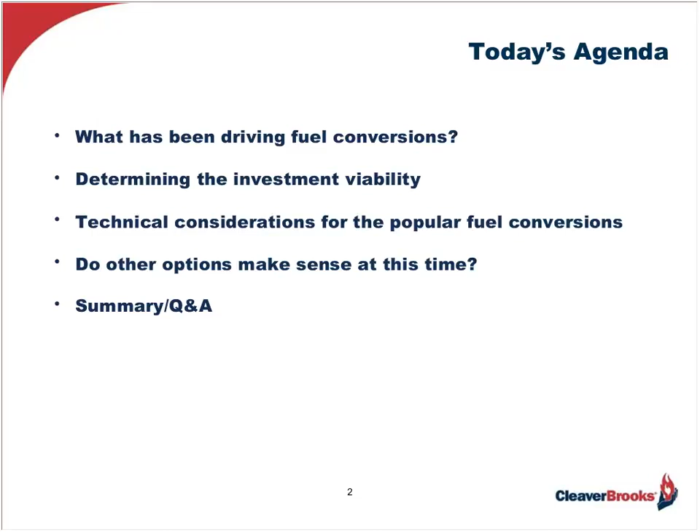Now, when considering what is motivating people to look at either adding a fuel, converting from one fuel to another, or just upgrading their existing equipment to burn a fuel more efficiently and reliably, the reasons are varied. But for the most part, the main driver is economics, or said another way, saving on that fuel spend. Unfortunately, if this is the only reason and one is uninformed on the other factors which might impact this fuel choice consideration, the expected savings can quickly become unexpected costs, but I'll address that in a bit. Before I do, let's look at the general possibilities for fuel cost reduction and where they may occur.

First, there's a possibility a lower cost fuel becomes available which was not present before. And this happens more than you would think. For instance, natural gas becomes available, and I'm currently burning either number 2 oil or propane. Now these two fuels, at least when I compare cost BTU to BTU, are more expensive.

And then there's the possibility our manufacturing process may be producing combustible liquid byproducts which we're currently paying to be disposed of. Or in the case of waste gases, we're just flaring off. Or maybe we're burning a fuel which, when we look at the costs for burning it and handling it, can be substantially reduced if we change to a simpler fuel to burn.

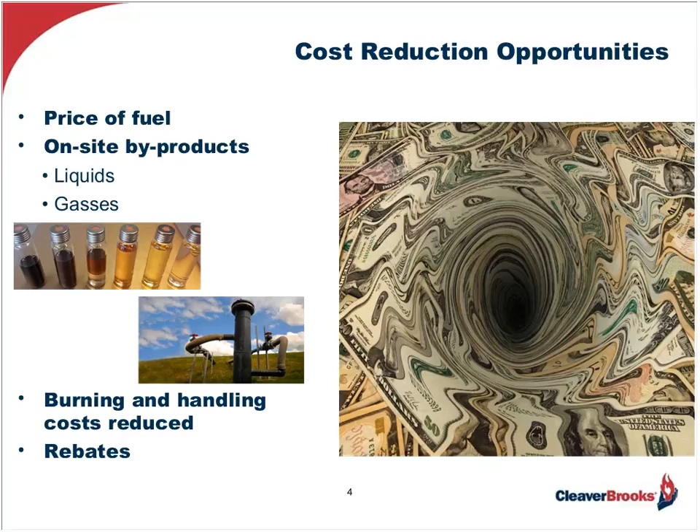Now, the other major driver for fuel conversions is reliability, especially when we're involved with critical processes. And I think a good example would be pharmaceuticals. In many cases, a stop in the process can cost thousands of dollars, not an hour, but a minute. So having an alternate fuel backup can seriously help in making or breaking a financial month or a financial year.

The other major driver is local code changes, which normally equates to upgrades of existing equipment, but if it has to do with the EPA, the Environmental Protection Agency, it may indeed involve a fuel change in order to more easily and economically meet the required standards. For instance, changing from burning oil to natural gas or propane will certainly positively impact NOx, nitrogen oxide, regulation limits.

Then, of course, we have those situations where our fuel burning system is outdated, inefficient, and unreliable. So it's time for a change or a major upgrade to new burner equipment, and maybe adding that change in fuel at the same time.

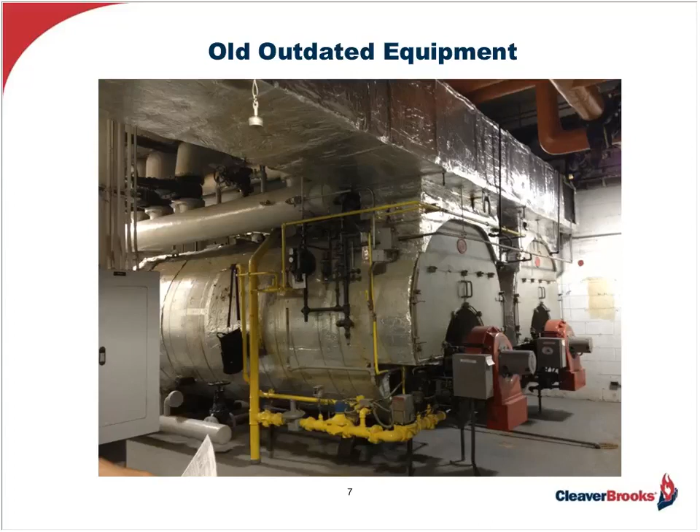And finally, we have the driver which has gained considerable legs over the past several years, and that's the environmental push. People across all walks of life have become so much more aware and educated about our environment, how finite our resources are, and how susceptible we are to dangerous pollutants which can negatively impact us for generations. As a result, we have many customers switching to cleaner burning fuels such as natural gas, while including NOx lowering capabilities to reduce the photochemical smog problem.

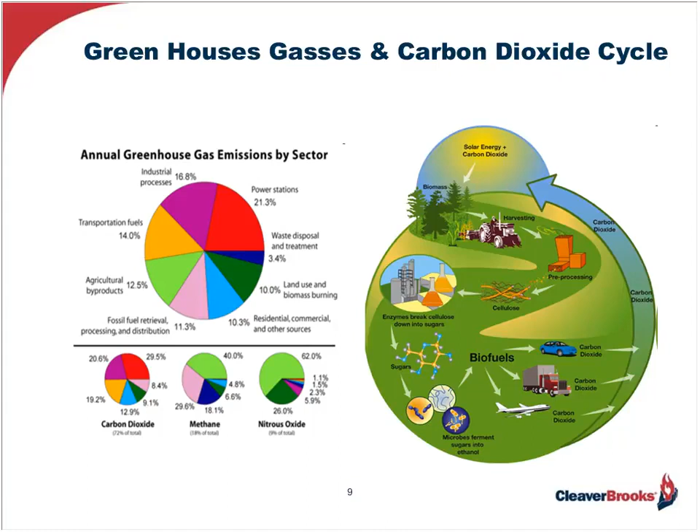Now, this, along with the burning of biofuels, which not only may save on the fuel spend while reducing pollution, but these fuels are also sustainable, all of which appeals to those embracing and highly prioritizing the environmental impact and the negatives associated with the burning of finite fuels with heavy concentrations of carbon.

Natural gas, as you all know, has been around for decades, and quite frankly, is the go-to fuel in many of our operations today. And that's because of its benefits, starting with availability and the ease of handling. It's easily piped to the burner, and burning this fuel is pretty straightforward and uncomplicated too.

It also carries a very competitive price, especially since we in the United States have been tapping into many of the shale reserves that have been discovered over the past 10 years, creating, albeit fluctuating, oversupplies.

Now, the other thing with natural gas, and this appeals to the environmentalists for sure, is its low carbon content, which lowers the amount of carbon dioxide released to the atmosphere, which is a precipitant of global warming, while also being clean burning, normally zero particulate.

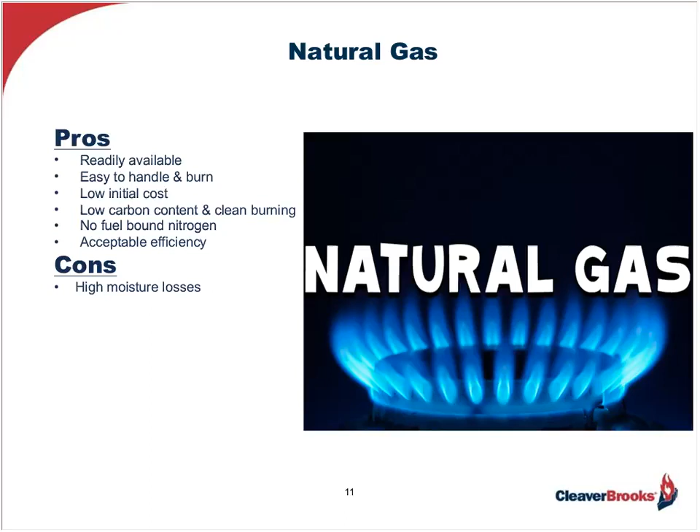Okay, what about the pros and cons for propane? Well, to begin with, just like natural gas, it's readily available. It's fairly easy to handle and burn, and I say fairly easy because it will require a vaporizer for burning it straight.

And a fuel-air mixer if it is to be reduced to the approximate BTU content of natural gas, which is about 1,000 BTUs per cubic foot, and then sent through the natural gas firing head in the boiler. In other words, use the same train. By the way, propane is about 2,600 BTU per cubic foot.

And like natural gas, it's clean burning, and because of its higher carbon ratio when compared to natural gas, it has a higher combustion efficiency capability.

Now, on the negative side, propane requires on-site storage and the maintenance issues connected with that, along with assuring that the supplies remain adequate. It has a higher carbon footprint, therefore more CO2 generation, which from an efficiency standpoint is really good, but not from an environmental perspective.

It's also more costly per cubic foot than natural gas, and if the propane is to be burned in the boiler without mixing with air to make it closer to natural gas, it requires a burner modification because of differences in the BTU content, the specific gravity, and so on.

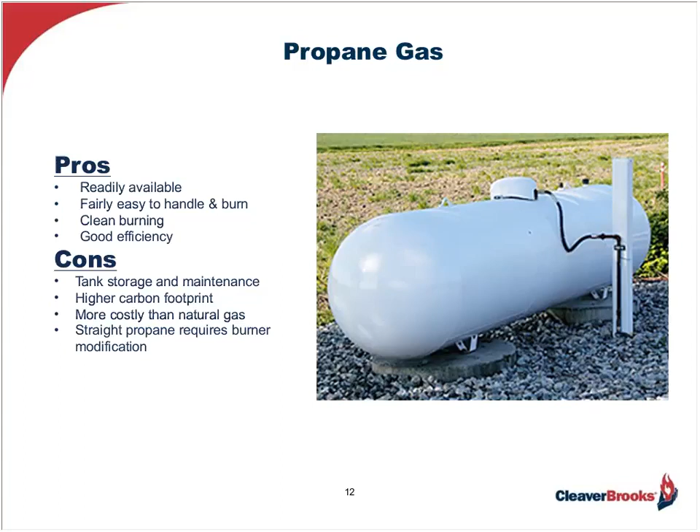That burner modification often affects the burner housing containing the orifices through which the gas emanates. In this particular example, we have what is referred to as a dual housing, incorporating separate sets of orifices for natural gas and propane. They're separately compartmentalized within the same steel unit.

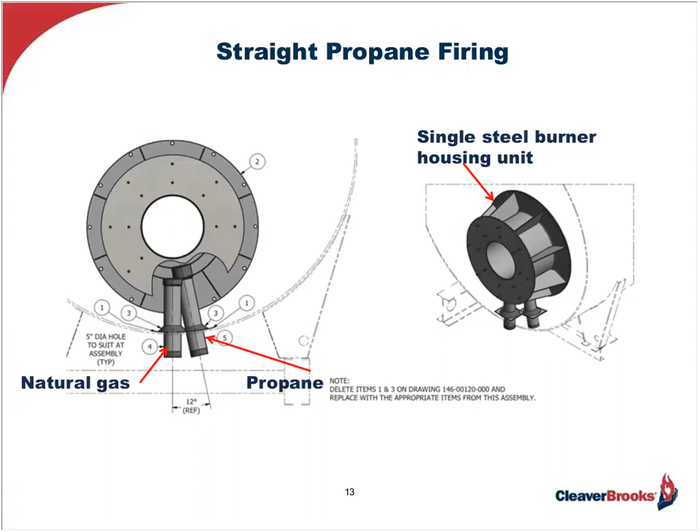Now, as far as burning standard oils, let's talk about number 2, number 4, and number 6. Even though number 4 and number 6 have been pretty much regulated out in much of the country because of clean air restrictions, they're still used, but certainly not as commonly as number 2 oil. Still, I think it's good to briefly discuss it anyway.

So when looking at the pros for both heavy and light oils, the first thing you have to say is they are both readily available. They're also delivering high combustion efficiencies, part of which is no moisture losses, making them an excellent primary or alternate fuel choice.

Now, when considering the cons for heavy oil, handling is an issue, including the need for heating it to the proper viscosity, and I'm talking 200 Saybolt universal seconds, and the need for atomizing it with compressed air in order for it to exit the nozzle with sufficient misting and volatility for proper combustion.

The storage tank, housed somewhere in the boiler room, has to be heated in order for the oil to be pumped to the burner and then back to the tank when that burner is modulating and not as much oil is being burned.

Because of the nature of the fuel having a high carbon and ash content, the boiler needs to be cleaned more frequently. And speaking of the constituents in the fuel, there are other chemical elements such as sulfur and nitrogen which need to be stringently controlled in order to pass specific EPA regulations in various parts of the country. All of this just drives up operating costs when burning the heavy fuel oils.

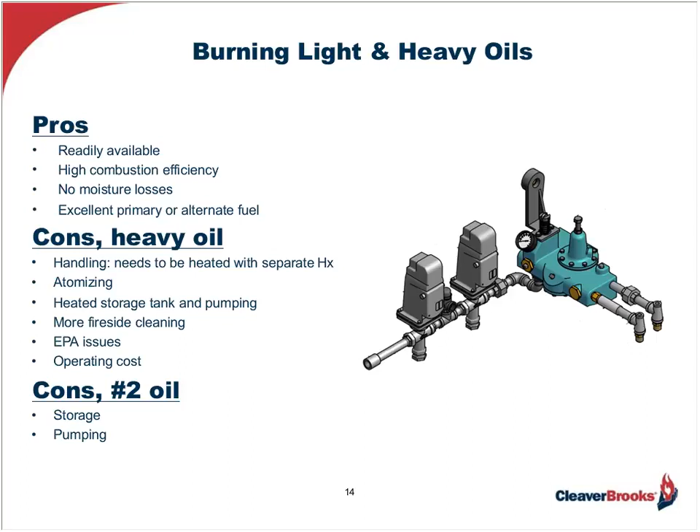Now, as far as the number 2 oil is concerned, the cons are pretty minimal compared to burning heavy oil. But we still have to contend with the storage tank, though it's unheated, and pumping to and from the tank. Cleaning is probably going to be more frequent than when burning natural gas, and as a result, total operating costs, including the price of this fuel, are going to elevate.

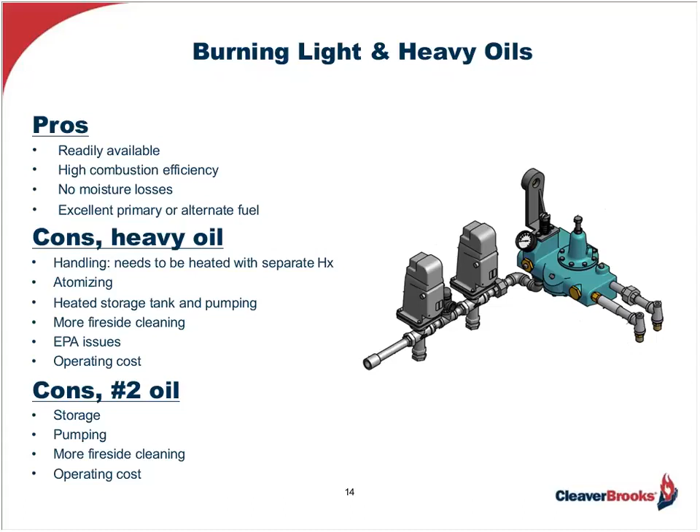Now, I might also add that an air compressor may be part of some burner packages to atomize the fuel, similar to heavy oil. But many manufacturers also use mechanical or pressure atomizing nozzles, thus not requiring a compressor in that particular application.

Okay, what about biofuels? You know, if we look at this term, it is often used collectively and interchangeably, but if we break it down into the fuels within the heading, we find it consists of solids, of gases, and of course liquids. What they all have in common is they are all sustainable because they're renewable.

For instance, we have solids such as corn, sugar cane, and grasses to make fuels such as ethanol. We have wood waste, which can be burned in boilers. And then we have various processing operations generating waste oils. We also have stores and restaurants generating fats. They all have BTU value, and they can all possibly be burned in a boiler.

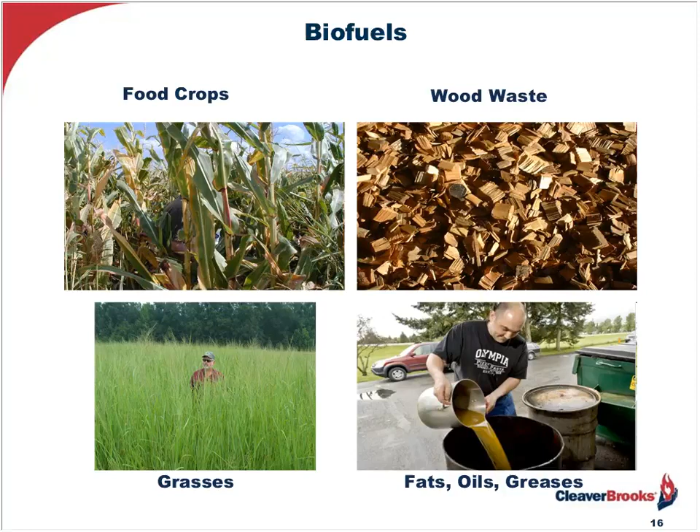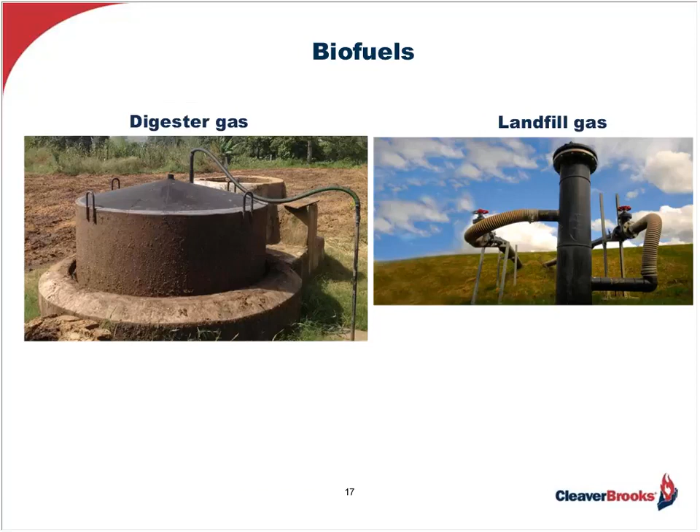We also have plenty of landfill sites and sewage treatment facilities that are producing primarily methane gas through what we call a microbiological degradation process. This can be burned in boilers as a primary or alternate fuel based on the quantity and the ready availability of the supply. So for our discussion today, when talking about biofuels, and because of time constraints...

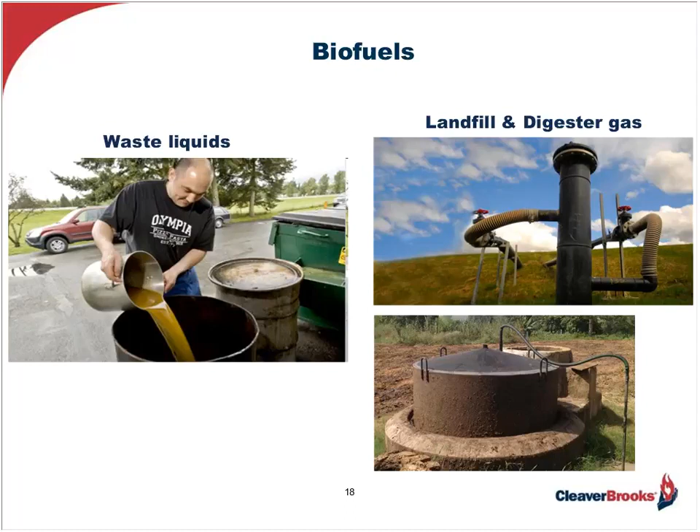I'm going to limit it to landfill and digester gas, both very similar. And then, of course, we'll talk about waste liquids. We'll start with landfill and digester gas pros and cons.

Looking at the pros, you see this fuel is very inexpensive and maybe even free if the generating process is in the plant, and that's where the boilers are located. And next, it's a sustainable and renewable fuel, and it's environmentally friendly, having a very small carbon footprint.

Now, as for the cons, this fuel has a very low BTU value, probably about 500 BTU per cubic foot versus natural gas at about 1,000. So you need to burn more of it to meet the boiler's capacity. It's also delivered at a very low pressure, meaning the gas train has to be larger to reduce pressure drops, or an expensive gas pressure booster needs to be added.

And it can be very corrosive with large amounts of sulfur contained within the gas. This means not only does the gas train need to be larger or the pressure boosted, but it also needs to be constructed of stainless steel, including the valve parts that would be coming in contact with this gas.

And then we have the transportation issue. If you are not generating the fuel yourself on site, you need to be next door to the supply to be able to use it. And then finally, the supply can often be unpredictable, meaning this is most often burned as an alternate fuel when the supply is sufficient. This means if your primary fuel is, let's say, natural gas, you will have two separate gas trains possibly coming into the same housing, that dual canister housing that I showed you before.

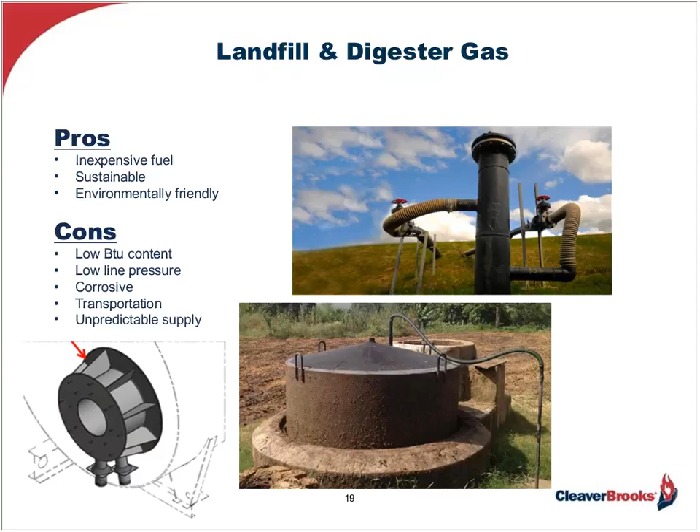Okay, let's now take a look at waste oils and the pros and cons for using these fuels, which might be coming from waste oil recovery services, food services, meat processing, and maybe some chemical or pharmaceutical manufacturers.

As far as the pros are concerned, they can be inexpensive to buy, especially if generated in the same plant, in which case the cost is zero. But even if not, the generator of these fats has to pay disposal costs. So the price to the user may be very low, possibly just having to pick it up.

Secondly, normally these waste fuels can have significant BTU value and can burn at a high combustion efficiency. And of course, they're sustainable, which leads to some environmental pluses, especially when they are being gainfully employed and not dumped into the sewer, into fields or rivers.

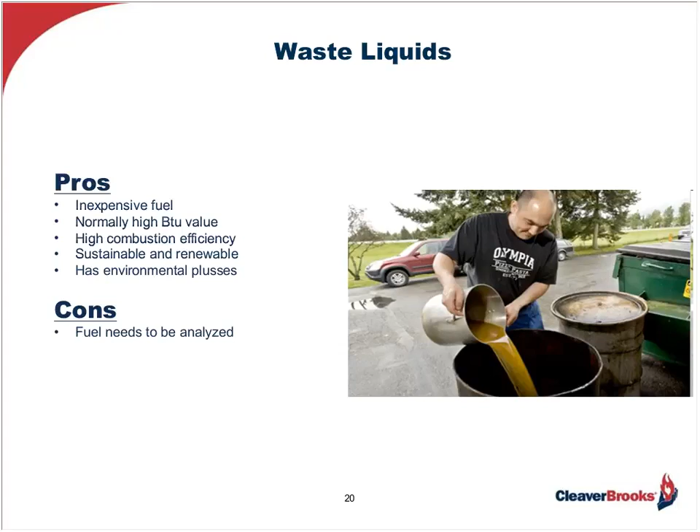Now, as far as the cons are concerned, these fuels need to be analyzed by the manufacturer of the burner equipment to make sure they can be burned without causing excessive deterioration of mechanical components, that they provide the benefit expected, and do not pose significant safety issues. Now, once that hurdle is crossed, the system has to be specifically engineered to assure proper combustion and maximum efficiency.

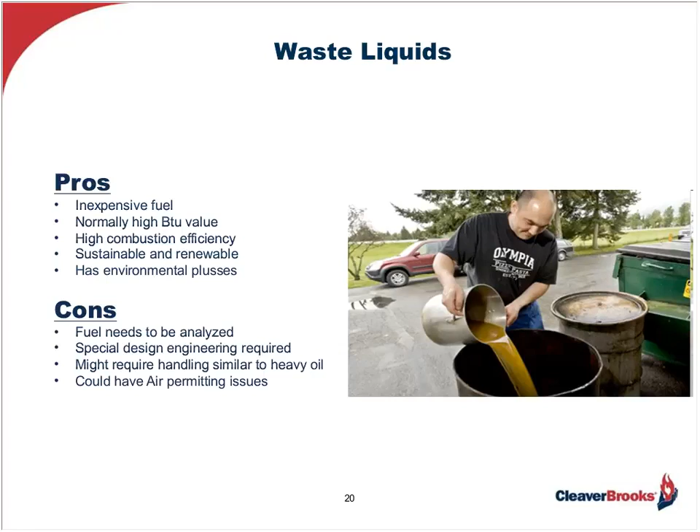Now, this, by the way, might involve handling the fuel similar to what I previously outlined for heavy oil, such as preheating, atomizing, and so on. And then finally, there may be some air permitting issues to be addressed based on the constituents found in the fuel analysis.

All right, so we've covered the popular fuels being considered for conversion, including their pros and cons. So let's say we decide to further the process.

What's the next step? Well, you know, if it were me, I'd make sure the boiler I was investing in was in decent shape. You know, why invest in a dead horse, so to speak? Maybe it's time to make some upgrades with a boiler that still has life, or maybe it's time to think about another boiler, either a new one or a used one.

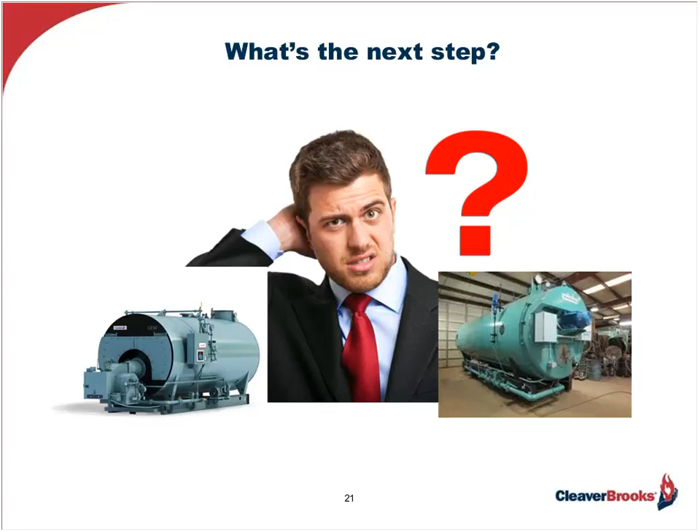In other words, take a hard look at the boiler and its key components to assure that they are sound before investing in the fuel change. And I'd start with the burner. Number one, is it in good shape, and does it provide good combustion efficiency throughout its turndown?

And don't judge the book by the cover. These burners look like they've seen better days, but they actually perform very well.

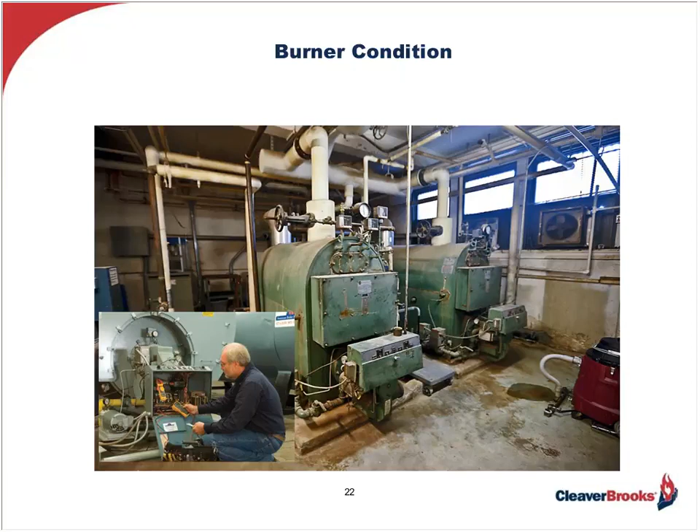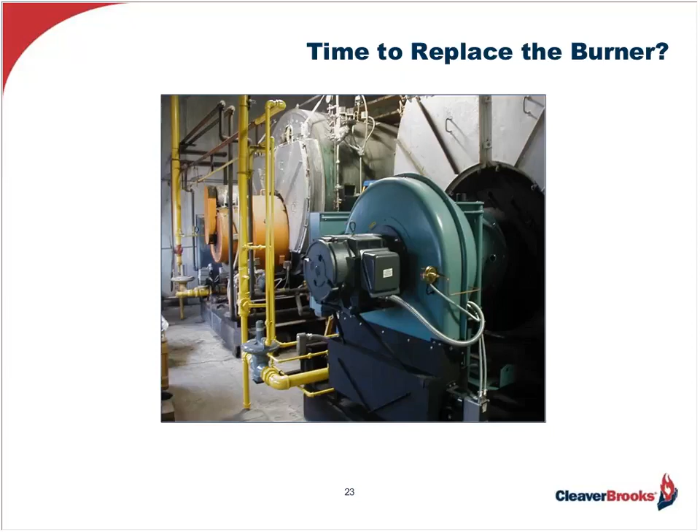Or maybe it's time to replace that burner, adding the fuel you intended to convert to. But in either case, keeping the burner you have or buying a new one, they have to be capable of burning the new fuel efficiently and reliably and safely.

Then it's on to the pressure vessel, making sure it isn't corroded or leaking or heavily scaled. Now, these can all be fixed, but the investment may just not be worth it.

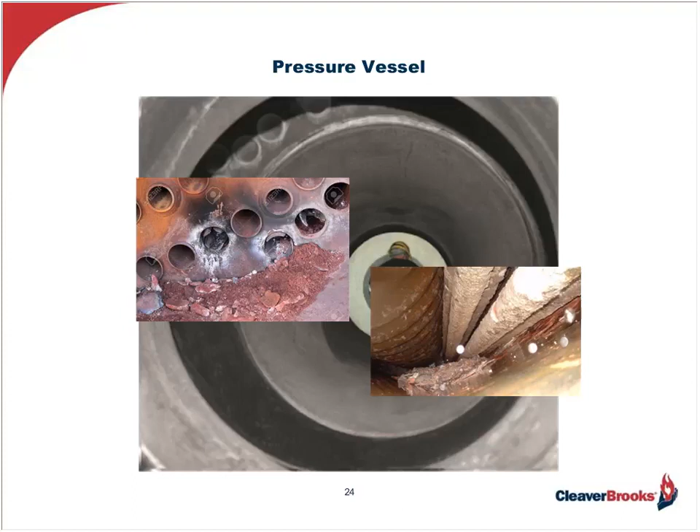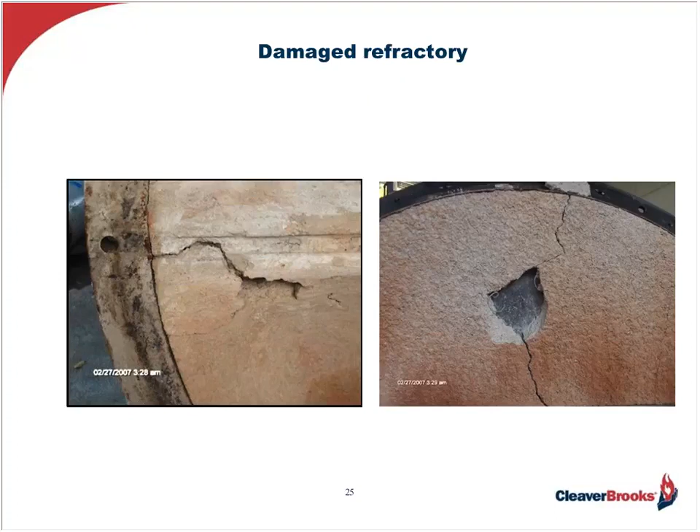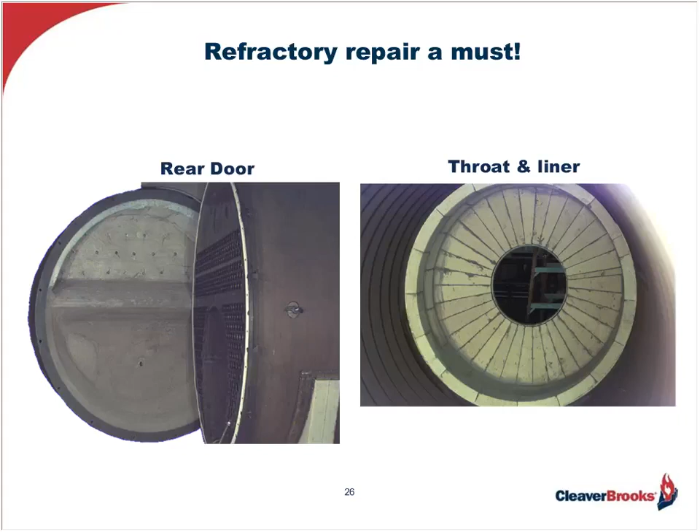And speaking of fixing what is wrong, fixing or replacing refractory insulation is a no-brainer. If it is compromised, as you see some examples of here, fix it as soon as possible, or efficient energy production will be sacrificed, along with serious mechanical and structural failures with the boiler following soon after.

Okay, we've decided the boiler is worth the investment. What does the conversion supplier normally provide with these fuel conversions?

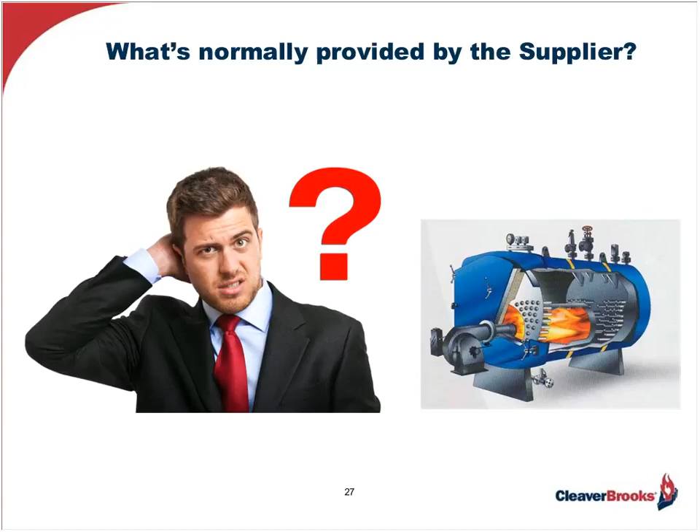And again, because of the limitation on time with these webinars, I'm only going to cover adding a natural gas conversion to a straight number 2 oil-fired boiler, and then we'll do just the opposite, go through a heavy oil to straight gas-fired boiler, because the heavy oil conversion also comes close to what we might find when adding a waste liquid fuel firing capability.

So overall, this should give you a good idea of what the supplier provides, regardless of the fuel being added or converted to.

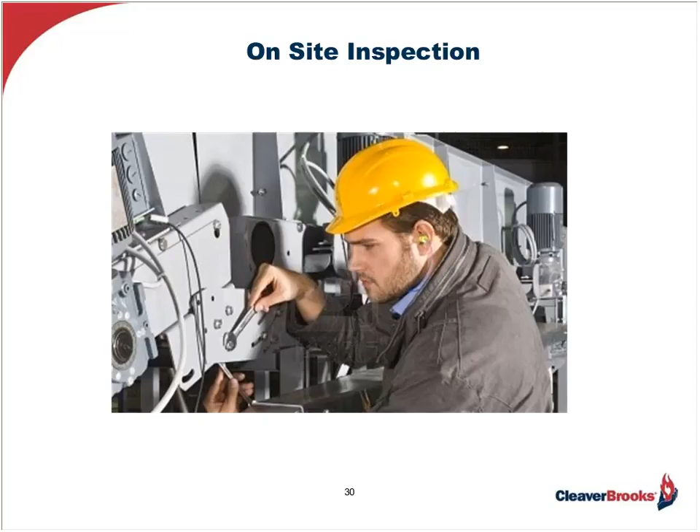So, starting with the natural gas conversion. The supplier has already had an experienced field engineer at the site to analyze the logistics of the room, including the existing utilities, as well as the details about the boiler, the existing burner configuration, along with its conversion adaptability, and then special note is given to the furnace into which the burner will be firing.

Now, this information is then sent to the supplier's engineering department, who analyze the existing conditions that have been provided by the field, that field engineer, and then determine what will be required to match the need and the existing boiler room conditions. Now, after the review is complete, a tailored engineered solution is determined and then documented in a formal proposal for the customer.

Including all the components required for the conversion and also including the labor to install it. Now, in a gas conversion, what is normally proposed and supplied is a new burner drawer.

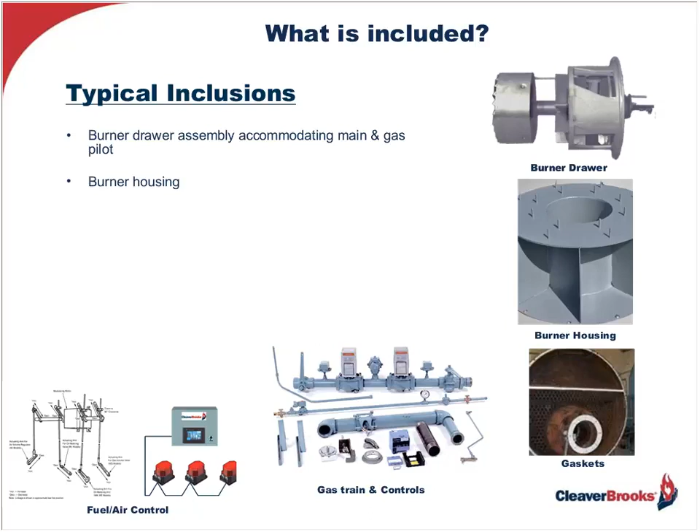Next, we will need a new burner housing in which the drawer fits, and it will include the entrance port for the main gas and the gas burner ring as indicated here.

We then have the gas train components as displayed on the screen, including all the required piping, valves, switches, and the complete pilot train. The fuel-air ratio control linkages, as seen in the lower left corner of the screen, are also included, and you may have a choice to go with the linkage system or the parallel positioning system that uses servo motors with a central controller, and that's also shown here, as you can see.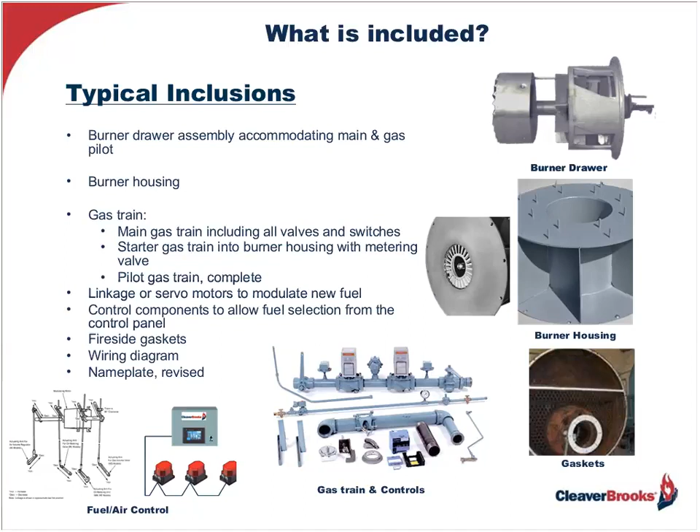You'll probably also find control components to be wired in and mounted for easy fuel selection, a fuel selector switch. The package is then completed by supplying the required fireside gaskets, a wiring diagram, and of course a new nameplate that now will be including the added fuel usage.

Now, the other thing I wanted to bring to your attention today is the new unitized gas trains that have come on the market. On the screen, you see the old standard gas train with large valves and fittings, including the vent connection between the two motorized valves, and not shown is the gas pressure regulator that would be mounted upstream.

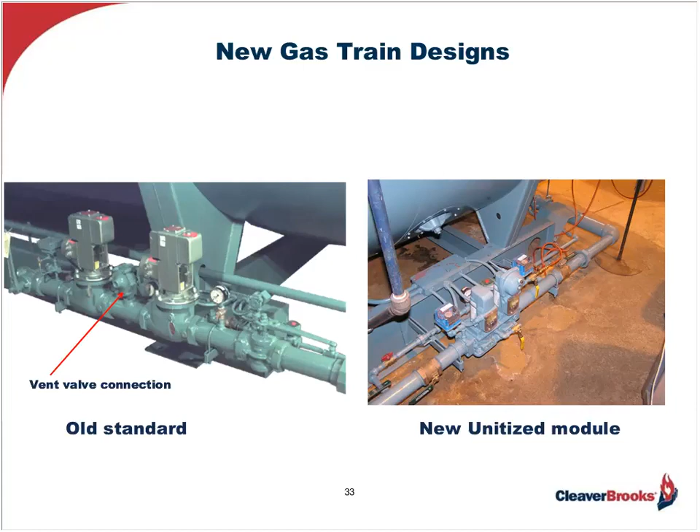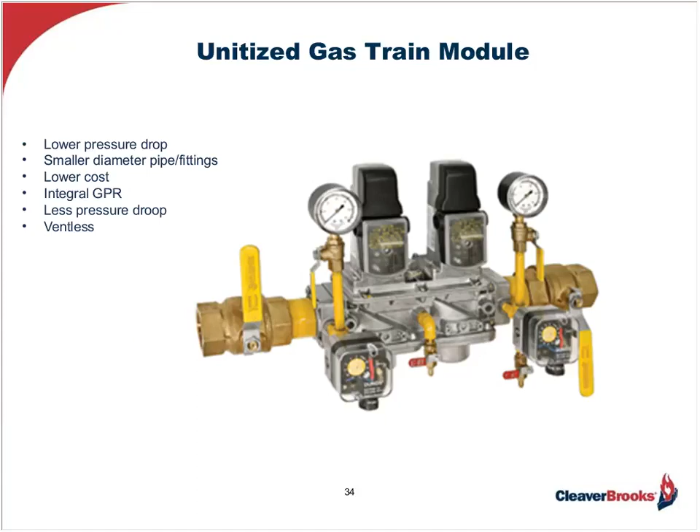Now compare this to this unitized gas train module, complete with motorized valves providing a much lower pressure drop, meaning smaller diameter piping can be used, which saves not only on the valve components but the piping cost as well. Besides being fully assembled, these trains incorporate an integrated gas pressure regulator, which experiences less pressure droop when the valves initially open, positively impacting flame stability.

All right, let's turn our attention to the liquid side. I'm going to detail a number 6 oil firing conversion, as this comes very close to many waste liquid fuel burning applications, such as waste oils and waste fats.

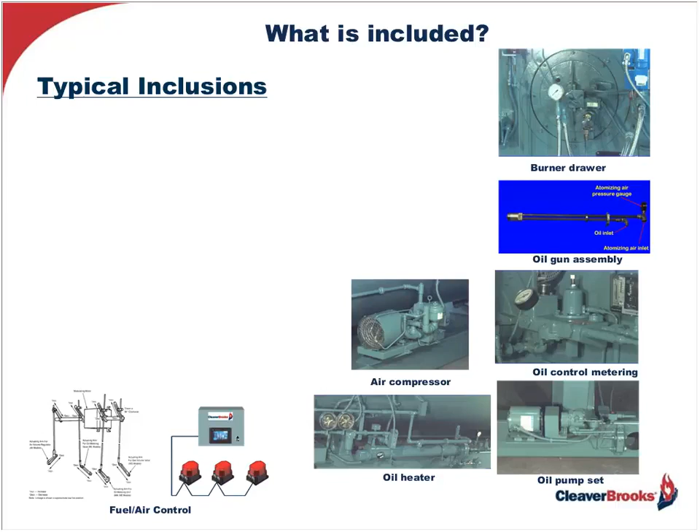With this type of conversion or addition, most everything is provided by the supplier, similar to the gas conversion, and starts with a new burner drawer, including the provision for the gas pilot or oil pilot, though I must say that gas is the preferred option and found to be most reliable.

It will also include the complete gas or oil pilot train, the oil gun assembly, including the integrated oil supply and primary air line for atomizing the fuel, the fuel oil control and metering system, and of course an oil pumping system, included along with an air compressor module if plant air is not available for fuel atomizing. And because this fuel has a heavy viscosity, an oil heater is required.

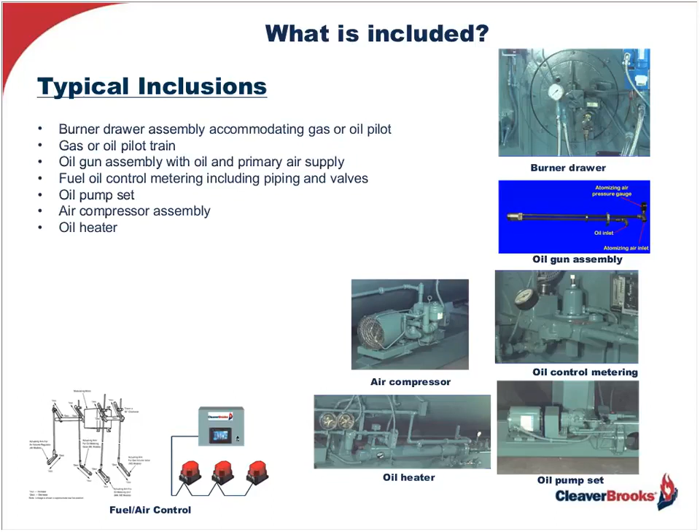Similar to the gas conversion, fuel-air ratio control will also be included, and it can be either linkage-driven or motorized control. Again, as with the gas conversion, the package is rounded out with the electric fuel oil selector switch or fuel selector switch, fireside gaskets, wiring diagram, and a new nameplate.

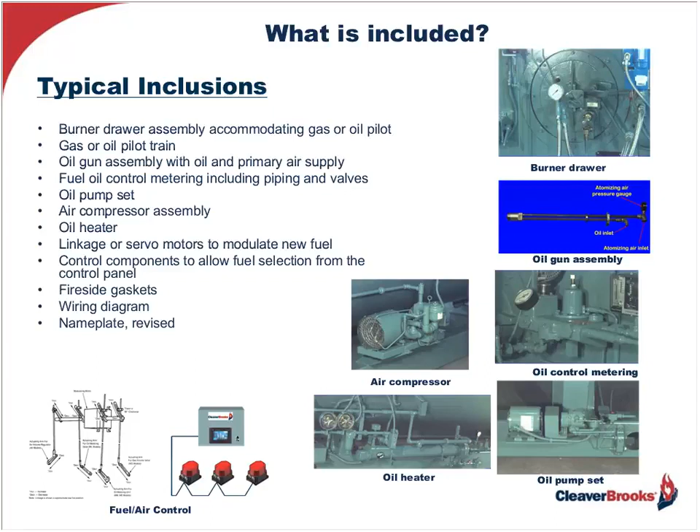Once the total package or kit arrives, it's very important that it be installed by a qualified technician who truly understands what needs to be done and can do it with a minimal amount of time and disruption for the customer. This normally involves a close tie with the supplier and the resources that he or she can provide if necessary.

Over the years, in my experience, customers have taken this time while converting from one fuel to another, or adding a fuel firing capability, to take stock and see if now isn't a good time to make some other upgrades. As a matter of fact, there are cases where a customer has multiple plants and one has a boiler which has been decommissioned and is only being used to salvage parts.

And it so happens another of its facilities is looking to add natural gas. In this case, the gas train is taken off the decommissioned boiler and sent to the other facility, saving the cost of the gas train.

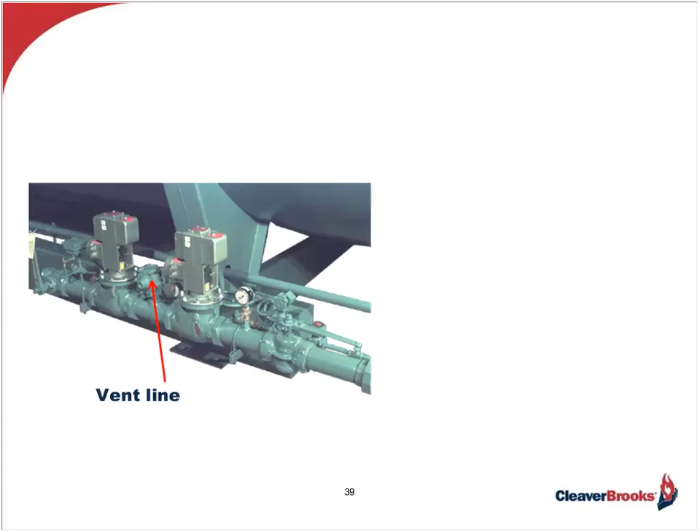However, it will need to be piped properly, having a vent which goes up through the roof for safe discharge of the gas trapped or leaked between the two motorized valves, unless they add a ventless option, including a new burner management system and end switches on the gas valves, which are electrically tied into the new burner management system, specifically designed to receive these signals and thereby prove when the valves are open or closed.

Now, this being the case, there's no need for a vent line because the only gas remaining will be the small amount trapped between the valves, which will pass to the burner once the cycle begins and the valves open.

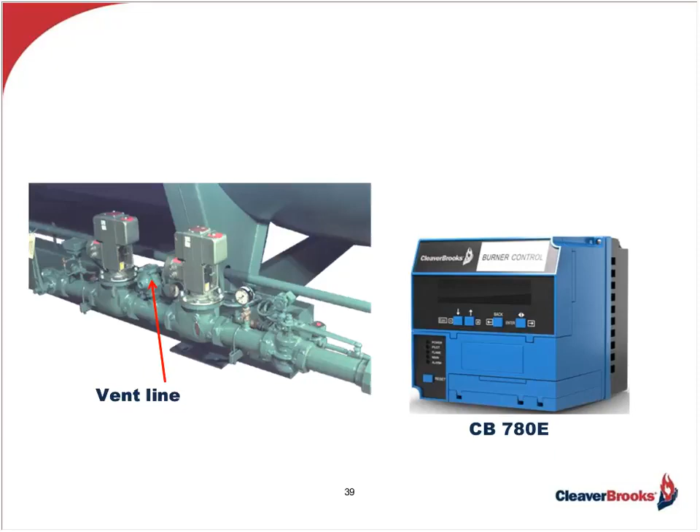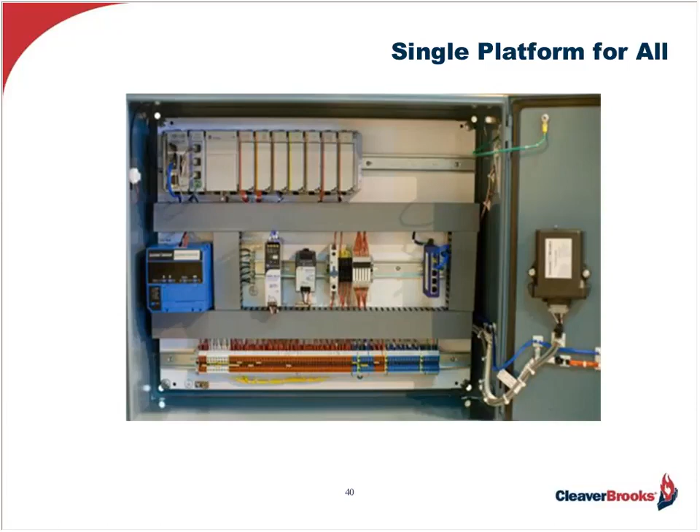And speaking of burner management system updates, maybe now is the time to incorporate the new burner management control into a PLC-based platform, giving the operators and facility staff numerous opportunities to tie in and monitor any number of functional operations. For instance, we've added digester gas firing capability and can now automatically switch to natural gas when the supply runs low, or the opportunity to add variable speed drive to the boiler's combustion air fan, saving significant amounts of electrical energy if the boiler modulates while tracking a varying load.

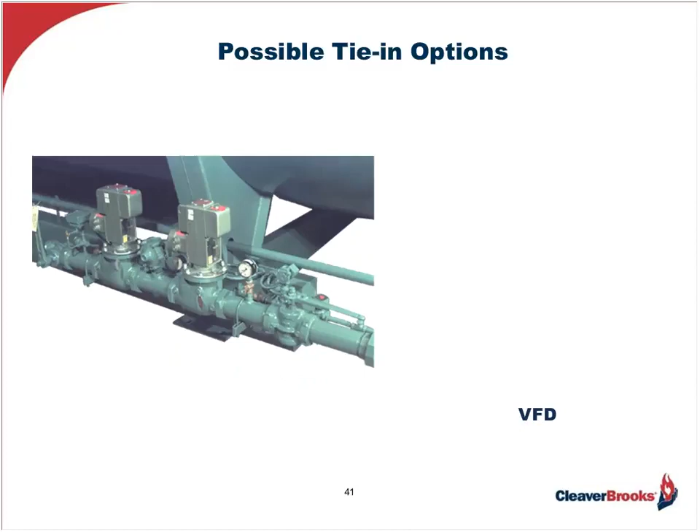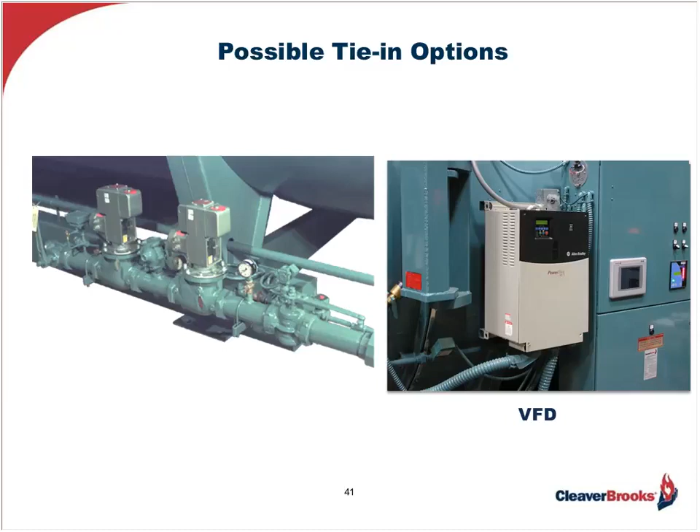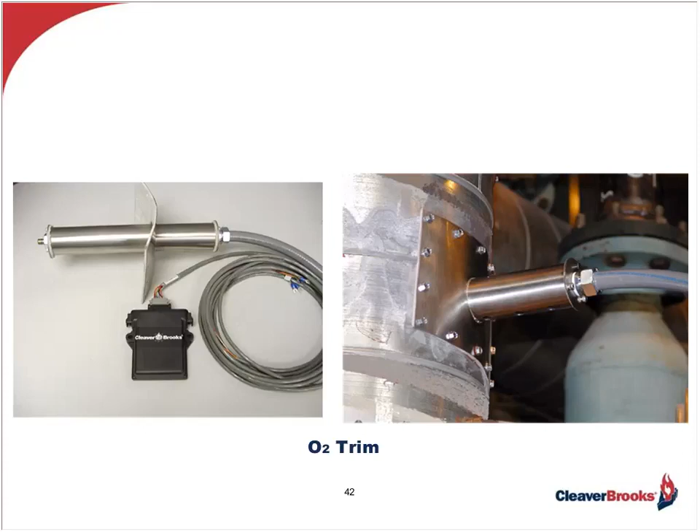The PLC platform can also accommodate and integrate oxygen trim, which compensates for uncontrollable and varying conditions such as ambient air temperature changes and barometric pressure changes, keeping the burner's fuel-air mix at the proper ratio for maintaining optimum tuned efficiency and safety. And then there's the auto-powered stack damper, automatically closing when the boiler cycles off.

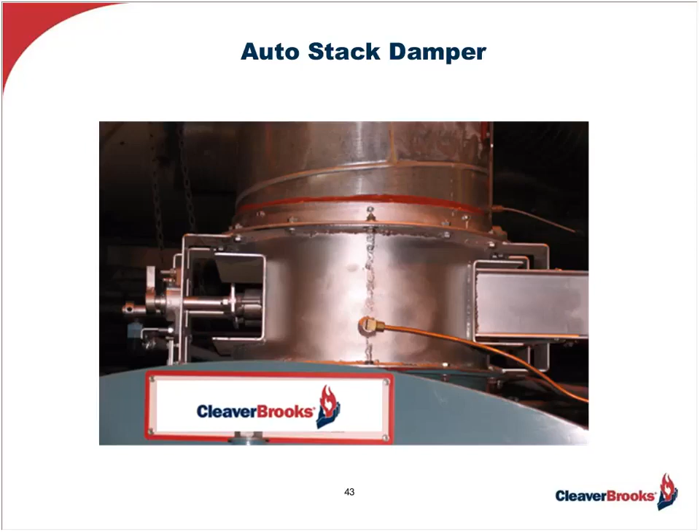This makes good economic sense because without it, if the stack pulls a draft of over 1 inch of water column, you have cooler ambient air rushing over the heated surfaces of the boiler and cooling it down. Then when the boiler cycles back on, this loss has to be made up by the burner to reach saturation temperature, and it's all dollars lost up the stack.

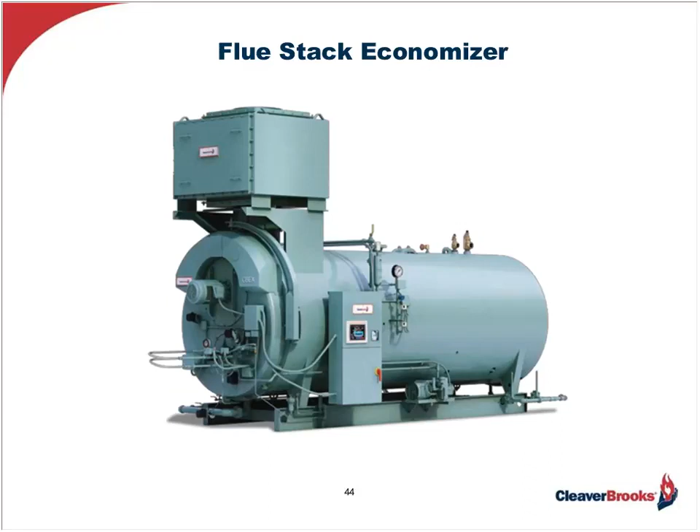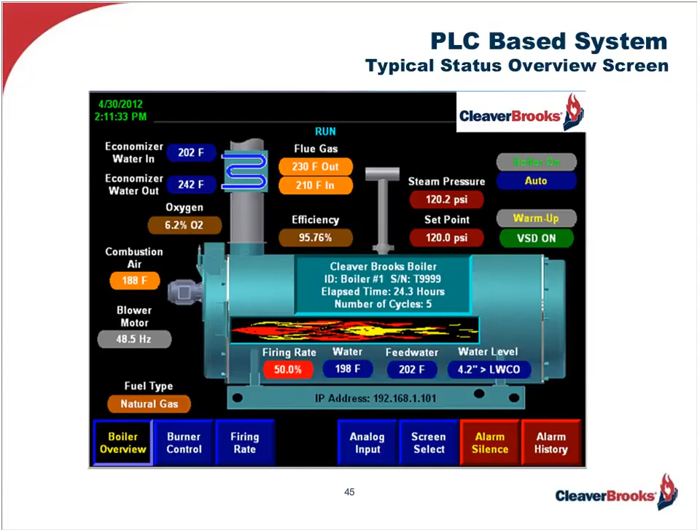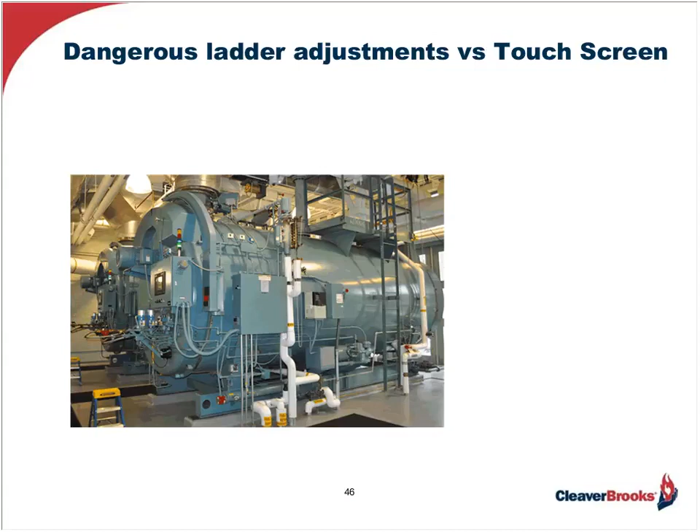I mentioned operating pressure and temperature versus set point. These boilers, as you can see on the screen, can get pretty high. I mean, 10 to 12, 15 feet to get to the pressure or temperature controls to reset them is not at all uncommon. So this means you have people on ladders, and people being people and getting distracted, they can fall, and that can be serious.

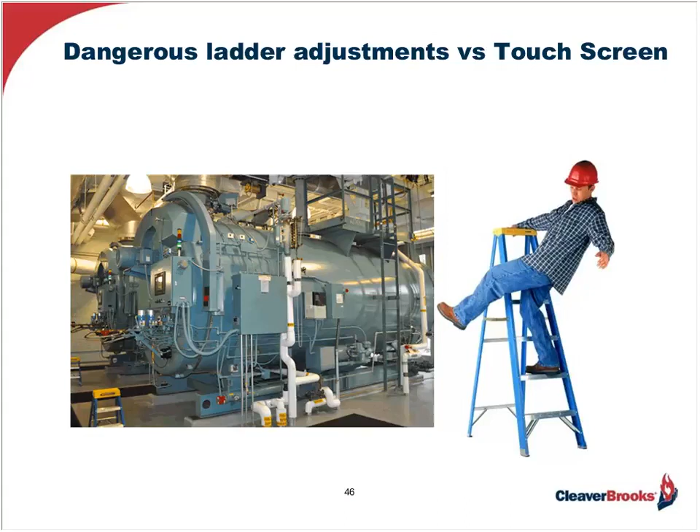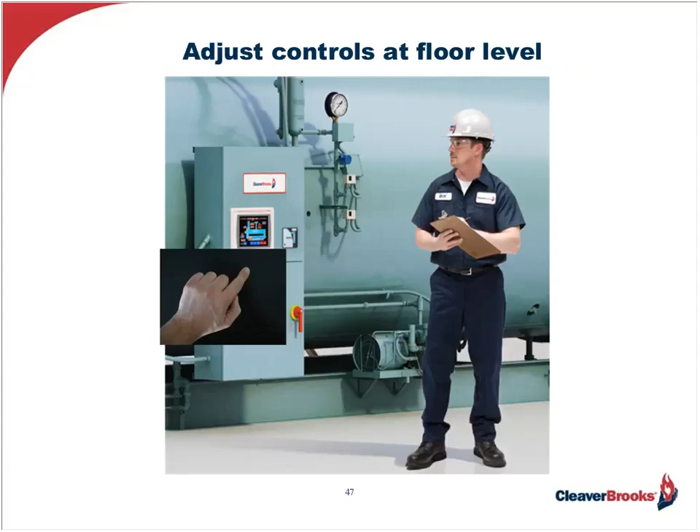Whereas with these PLC-based controls, all the pressure temperature control adjustments are performed at floor level. With the touch of the screen, couldn't be simpler and certainly couldn't be safer.

And finally, these systems can provide interconnectivity of everything in the boiler room, not just the boiler and its accessories, but all the accessories in the boiler room, including the water treatment equipment and the boiler feed, such as the vented receiver or the deaerator.

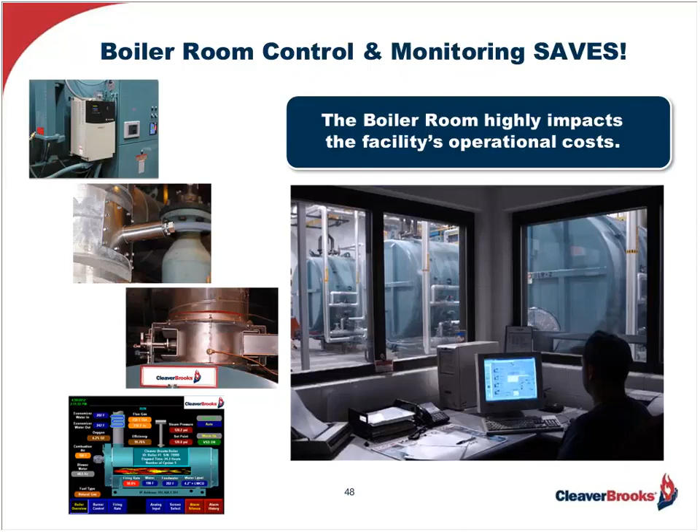As I've said so many times in the past with these webinars, knowledge is power. The more you know about a complete boiler room system and how it's performing minute by minute, the more you can positively impact efficiency, reliability, and safety. It just makes a whole lot of sense, not only logically, but in the financial sense too. And in that case, I would spell it C-E-N-T-S.

When I talk about knowledge being power, it starts, of course, with training and education. But then, equally important, you need a strong communication system to transfer the information to the people who can make a difference. And that's exactly what these PLC-based platforms allow us to do through various communication tools.

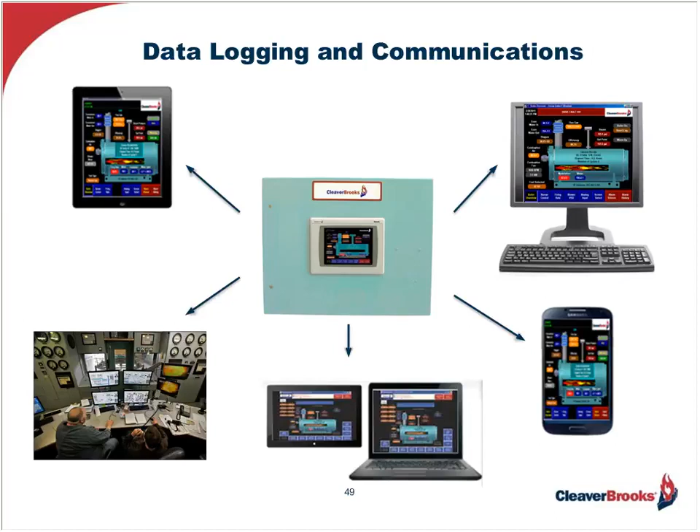Be it a handheld smartphone, as you see here, a laptop, an iPad, or a desktop. The integration with these PLC-based platforms is virtually limitless, as it allows us to connect to the company's far-reaching SCADA systems, for instance, for the monitoring and control of the entire industrial operation or complex.

Pretty mind-boggling, what I've seen over the last 50 years as I note the strides in this industry, which was so stodgy for so many years, evolving dramatically over the last 20 years. It has been primarily through the adaptation of advanced industrial control technologies and incorporating these on our boilers and boiler accessories, making them so much more efficient, reliable, and safe.

Pretty amazing. Okay, I'm sorry about that interruption a minute or so ago. I don't know exactly what happened. Amazing technology, as I was just saying, right?

Anyway, here's some of the takeaways. Fuel conversions are normally driven by economics, reliability, code changes, outdated equipment, and environmental issues, but other considerations need to be reviewed before that step is taken.

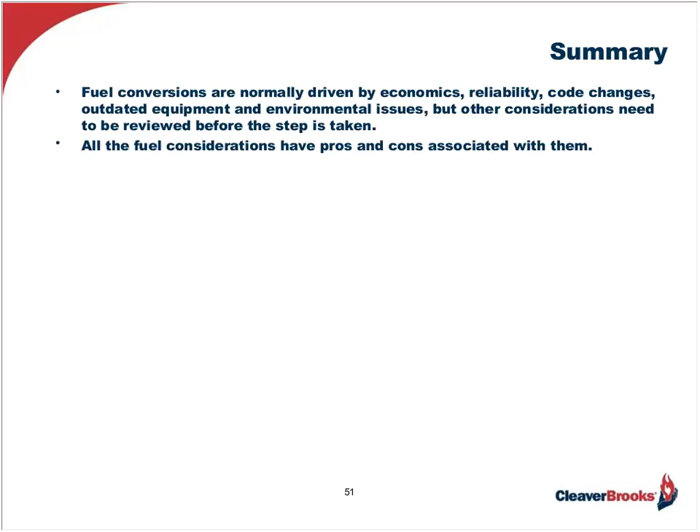All the fuel considerations have pros and cons associated with them. I think I went through the major ones. The biofuels can be divided into solids, gases, and liquids.

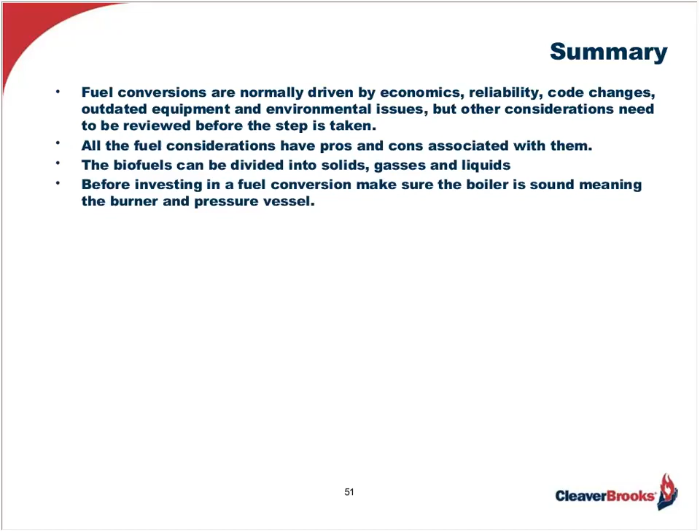Before investing in a fuel conversion, make sure the boiler is sound, meaning the burner and the pressure vessel. A good fuel conversion retrofit requires an experienced field representative and strong supplier with engineering know-how and experience.

Fuel conversions involve burner adaptations, including the fuel air handling, piping assemblies, refractory repairs, and controls. Gas trains have changed, now including unitized assemblies offering lower pressure drops and zero vent pipe purging of leak gas with a BMS, burner management system, and gas valve switch adds. Those are the proof of closure switches on the gas valves.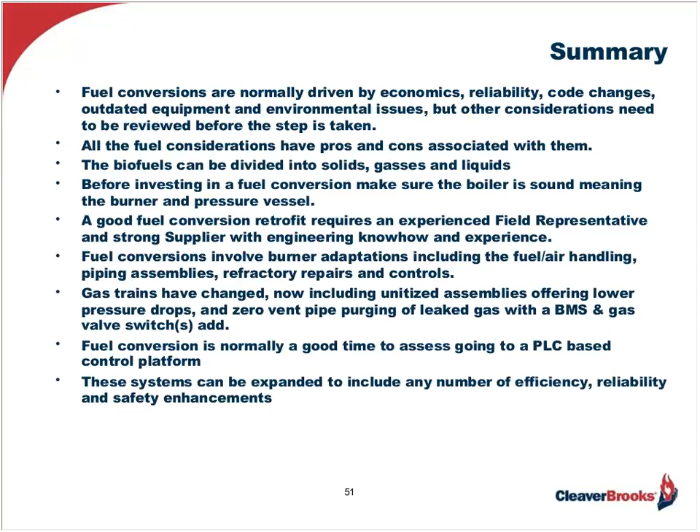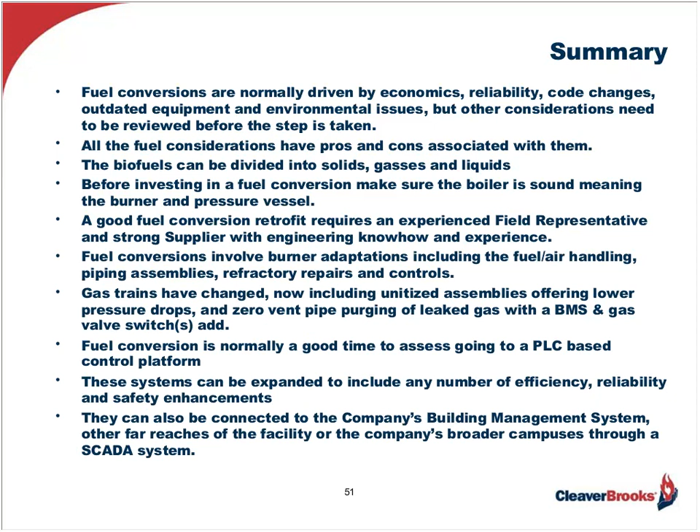Fuel conversion is normally a good time to assess going to a PLC-based control platform. These systems can be expanded to include any number of efficiency, reliability, and safety enhancements. And they can also be connected to the company's building management system, process system, other far reaches of the facility, or the company's broader campuses through a SCADA system. Okay, so...